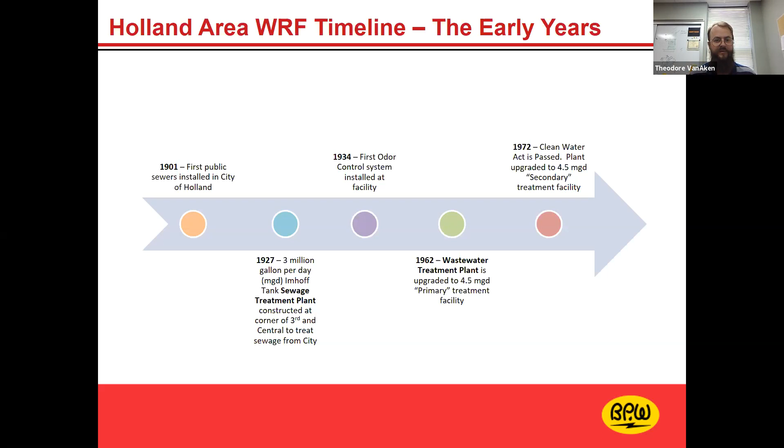In 1927, we added our first actual treatment process, and continuing forward in 1934, we added some odor control. In 1962, that's when we really started to build the wastewater treatment plant as you see it today. And in 1972 is when the Clean Water Act was passed, and that really has guided the development of the water reclamation facility from that point on.

It may not sound like it, but this was really a big step, because to keep people from getting sick, you need to get the sewage and the pathogens away from them. And that's what this allowed, and it allowed our city to grow without having major cholera outbreaks or diphtheria and other human pathogens such as that.

We did have septic tanks on those two main discharge points. So there was some treatment, but I don't know I'd even call it that, because we also had industry back in the day, tanneries and canneries especially, that had a lot of wastewater. So those septic tanks may have caught some solids, but really the stuff going into Lake Macatawa probably wasn't so nice. But given there were a lot less people back then, the lake could actually accept more pollution than it can today with the development that's gone on since then.

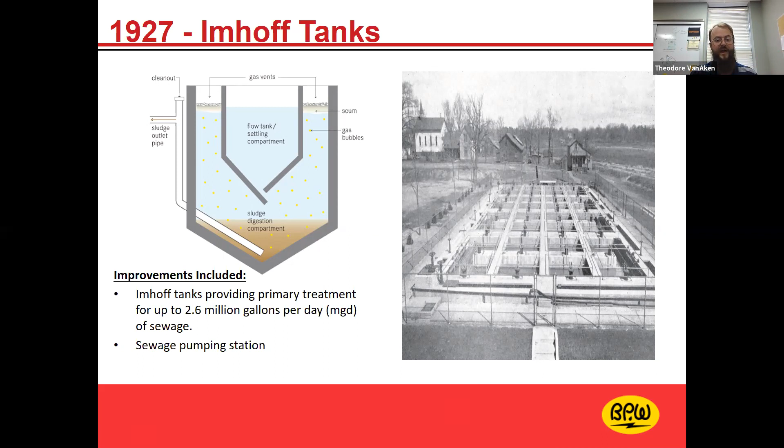The Imhoff tank was a treatment process kind of like a septic tank, but it also would anaerobically digest the solids that fell to the bottom. So the left shows a cutaway of that. It's just something that allows settling to happen. Not a lot of treatment, but certainly better than what we had prior to that with the septic tanks.

And we've always and still are very concerned with odor at our site. We're very close to the city of Holland. Even back in those days we were, there's houses all throughout the site where we're at currently. So we did build an odor control system as far back as 1934. And really what this odor control system did was it burned the gas that came off of the Imhoff tanks, the digestion that happened at the bottom.

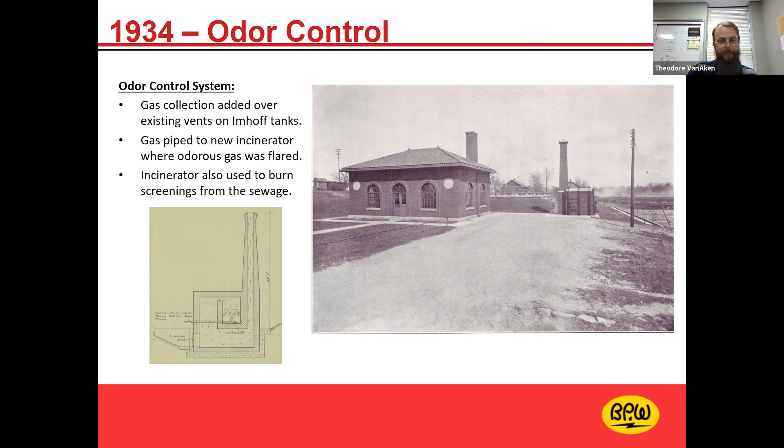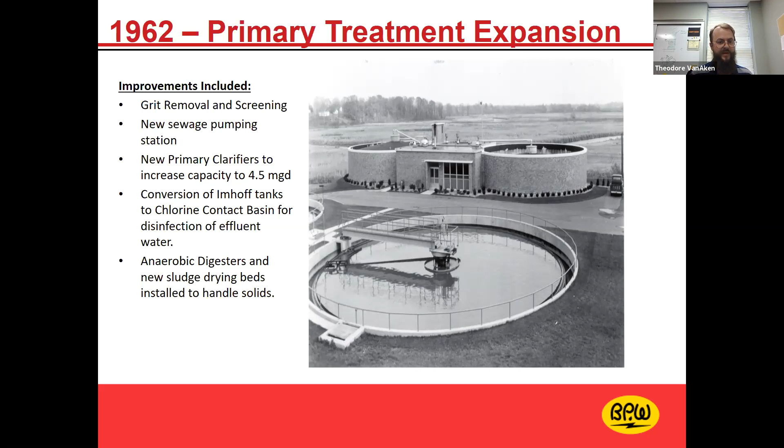So now we start to get into the secondary treatment. These are improvements that have come around mostly from the Clean Water Act at this point going forward. Primary treatment is easy, it gets a fair amount of your pollutants out, but the water that comes off is still pretty gray, pretty smelly. The secondary treatment process is what allows us to get to what I like to call nice, clean, clear water that can be safely discharged into a lake, such as Lake Macatawa.

So to do that, we have to add aeration to feed bacteria to break down pollutants. And then we have to add secondary clarification steps that allow the pollutants and the bacteria to settle down to the bottom of the tank. We'll dive into that when we go through the plant processes a bit more in depth, but these structures are all still in use today as well.

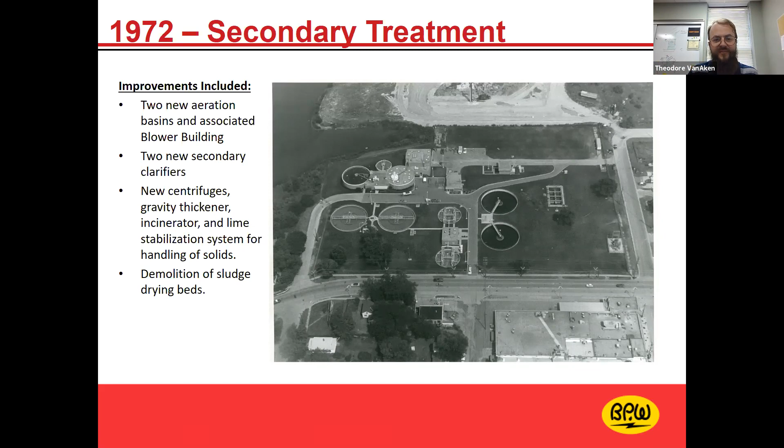We did add some new solids handling equipment for dealing with the biosolids that come off. And then you can see on the north side, that's the Window on the Waterfront park now, but back in those days, it was used as a dump. So there's a lot of work going on over there.

So really from 1980 until today is when the plant, as we see it now, really came into being. We expanded to a regional facility in 1980.

In 1992, we added a true odor control system. We had some odor issues back in those days. We also covered tanks, and we had a very successful program going from 1992 to 2017 of reusing our effluent for the James DeYoung coal-fired plant. In 1996, we did a major expansion to increase our capacity to be able to treat an average of 12 million gallons per day of incoming sewage.

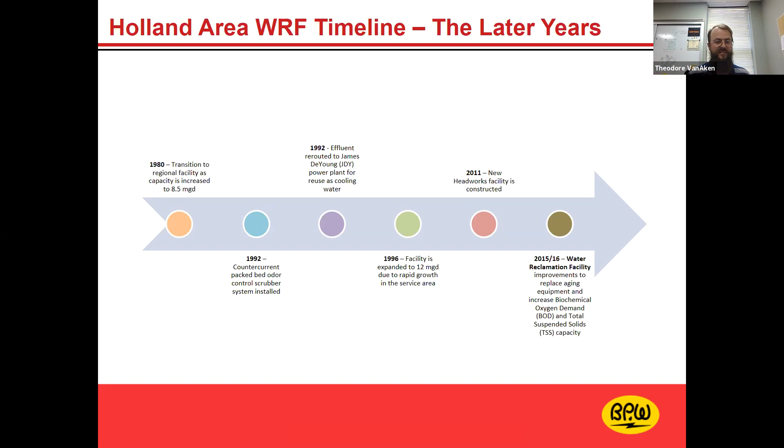In 2011, we added a Headworks facility that I'll review as we go through. Then in 2015, we revamped our plant to expand biological treatment capacity in our secondary treatment, as well as added solids handling capacity, which brings us to the current project we're working on today, which is the anaerobic digester that I'll touch on later in the presentation.

So in 1980, not only did the city of Holland continue to grow, but the townships were seeing a lot of growth on the north side of the river. You had Holland Township, Park Township. We need to do something with their sewage. So the plant was expanded and we added flow from the north side, which comes across the river to our facility for treatment. So we are now treating sewage not just from the city of Holland, but Fillmore Township, Laketown Township, Holland Township, Park Township, and up until recently, Zeeland Township all came here to our facility for treatment.

The west plant, which is where I'm physically sitting right now, on the west side of River Avenue, was built as a high purity oxygen activated sludge process. This uses, rather than ambient air to provide oxygen to bacteria and microorganisms, a refined oxygen product, because that's all the microorganisms really need. So it allows you to treat more in less space.

We added a new administration building, so my office that I'm sitting in currently was added. We added a new maintenance shop. So the plant got a lot bigger at this point, 8.5 million gallons per day average.

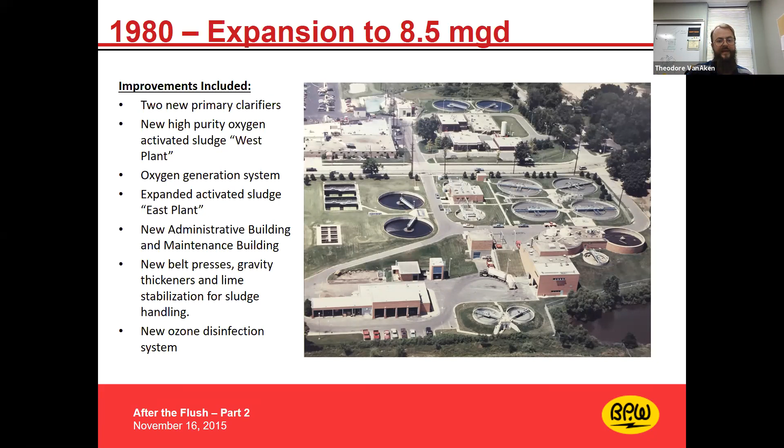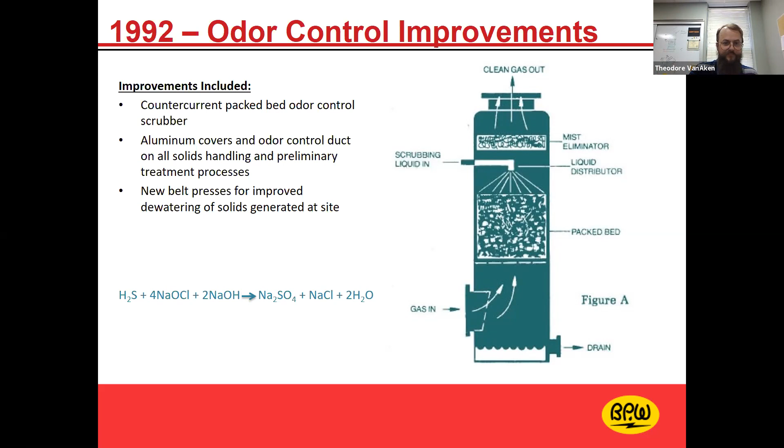In 92, this was actually very forward-thinking on my predecessor's part. We're discharging all of our water from our site into Lake Macatawa. Well, why not utilize that water, which is very clean, and in many cases cleaner than what's in Lake Macatawa, and use it for cooling water at the James De Young power plant. Coal-fired process uses a lot of cooling water. So by discharging our effluent directly into JDY's influent, it allowed them to have cleaner cooling water. They didn't have nearly as much plugging of their heat exchangers. And for us, we didn't have to worry about removing the chlorine from the effluent. So it was a win-win situation. The new Holland Energy Park was built and James De Young was retired in 2017, which meant we had to take on some more duties than before.

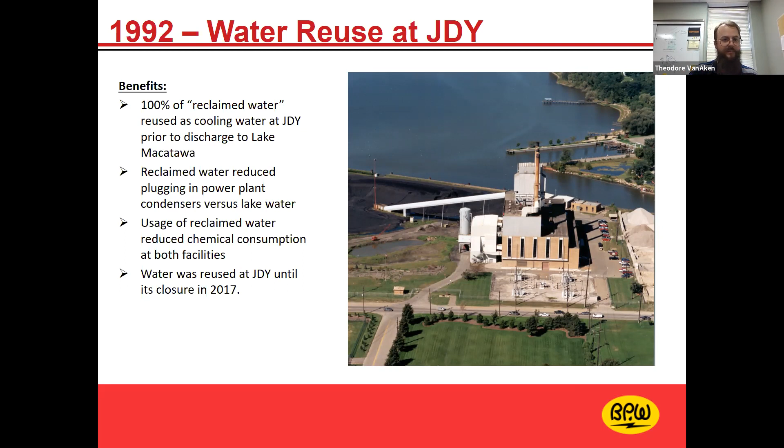Our last real major expansion was in 96. That's when we brought ourselves up to our current capacity, so we currently have the ability to treat on average 12 million gallons per day of sewage coming to us. The way we got to that 96 expansion is you can look on the west side, we actually expanded. There's more reactors there, and there's 2 more secondary clarifiers. That was the big change we did. We added some more aeration to the east plant as well, the part of the plant on the east side of River Avenue.

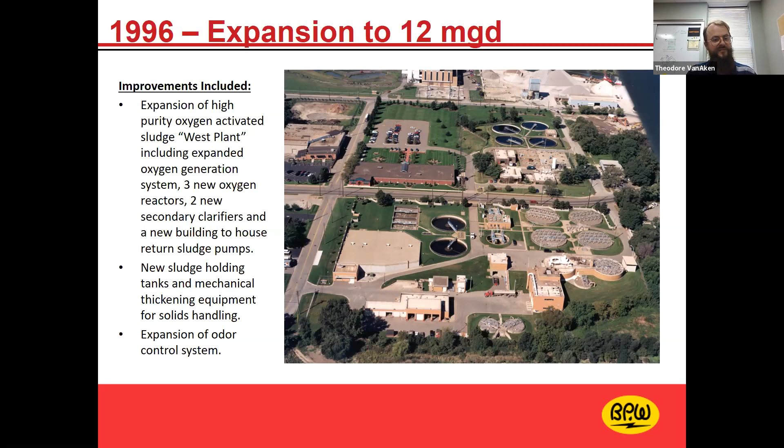So we added some holding tanks for our solids as they're produced, and then we expanded our odor control system.

In 2011, we added a Headworks facility, which I'll go into in more depth further down the line. What Headworks does is screen your incoming sewage flows to remove inorganic particles—sand, gravel, boards, toy cars, whatever finds its way into the sewer makes its way to us. We didn't have a very good Headworks before this, which meant a lot of pumps would plug up and mixers would get covered in rags and other debris. So this facility was built to help us with that.

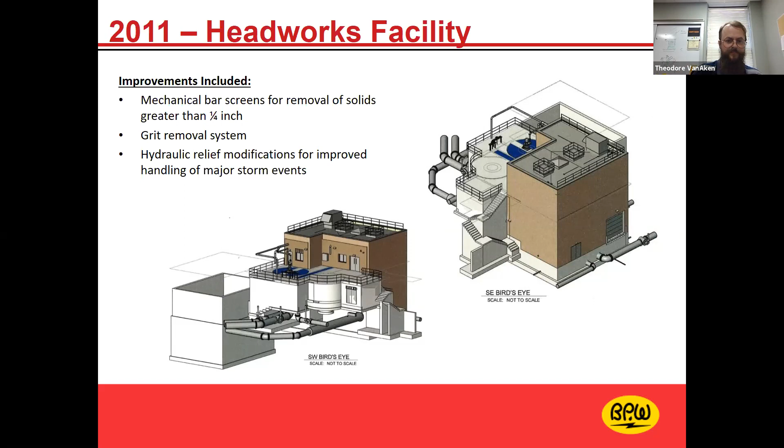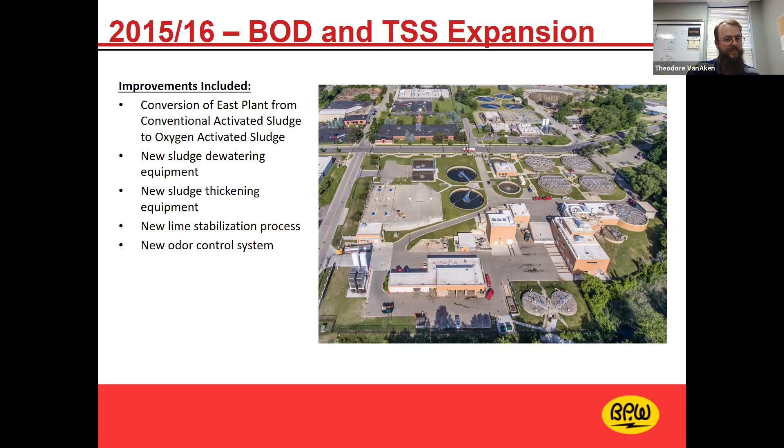In 2015, 2016, this picture looks very similar to the 1996 expansion, but the main changes were converting the plant side, on the east side of River Avenue, to high purity oxygen, as well as the west side. That allows us to get 30% more secondary treatment in the same tank space. For those familiar with our location, we're pretty constricted as to where we can continue to grow. We replaced our dewatering and sludge processing equipment, and replaced our odor control system with the same type to keep that going. That really gets us up to the project today, where we're working on the anaerobic digester, which I have a section that dives into.

But before we get to that, we should really touch on how we treat the sewage coming to us at the water reclamation facility. That's what this portion of the presentation is going to focus on.

Our inputs: we're connected to the sewer system, and we get domestic sewage, like what comes from a household or apartment building—normal toilet, shower, sink drainings. We also have commercial wastewater, like a car wash or a larger store like Walmart or Meijer, and industrial wastewater, which can be very concerning because some industrial processes produce pretty nasty waste. I'll jump into how we manage those in a bit.

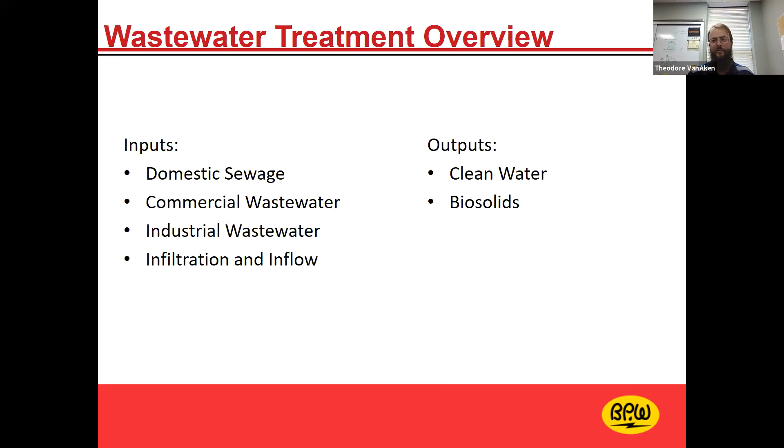Our outputs are really two things. We have the clean water that we've reclaimed—we've pulled all the pollutants out of it, and that's ready to go out. And then we have the biosolids, which is a big part of what we're doing right now with this new anaerobic digester project.

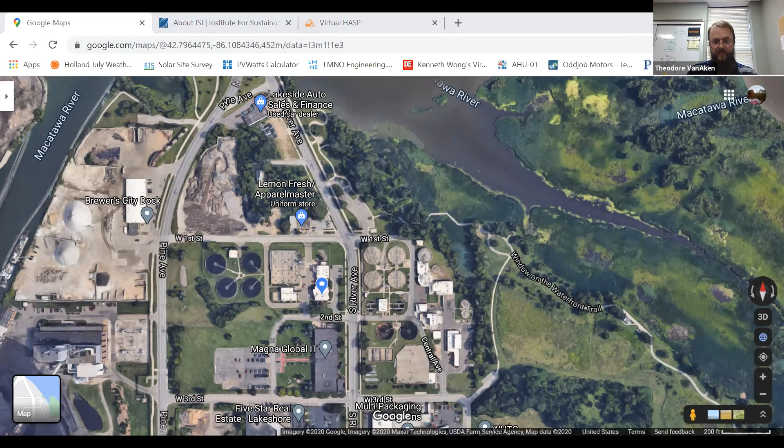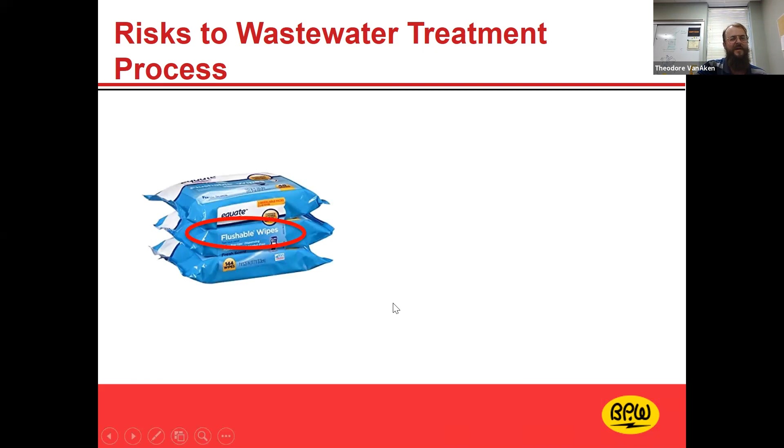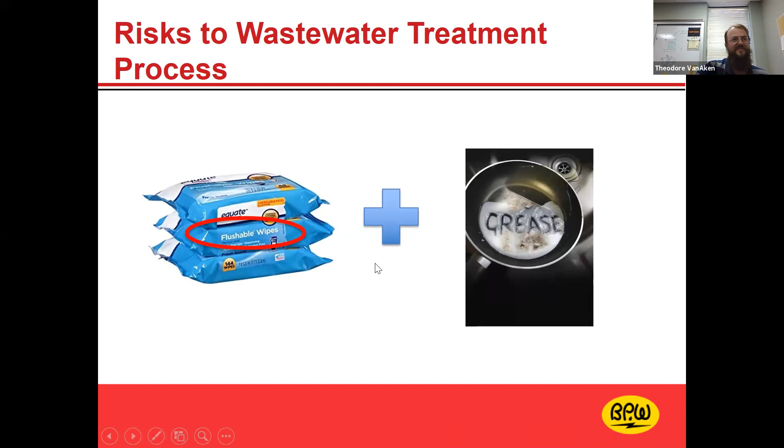Same thing happens here in Holland, just on a much smaller scale. We have crews that spend many hours a week jetting out sewers, trying to clean them out just to keep the wastewater coming to us. And even when it hits our facility, we still run into issues here as well. It plugs things up, it's dirty, it smells bad. So please, just take note, be very careful about what you flush down the toilet or send into the collection system, because it can have a huge impact.

Expenses and safety too, because it's not only unsafe for the worker to go in there, but when the sewer does plug, it will cause the sewage to back up and it could overflow manholes. It could even overflow in your basement, which none of us want to happen. It's happened to me at home before, and it's really not a great day.

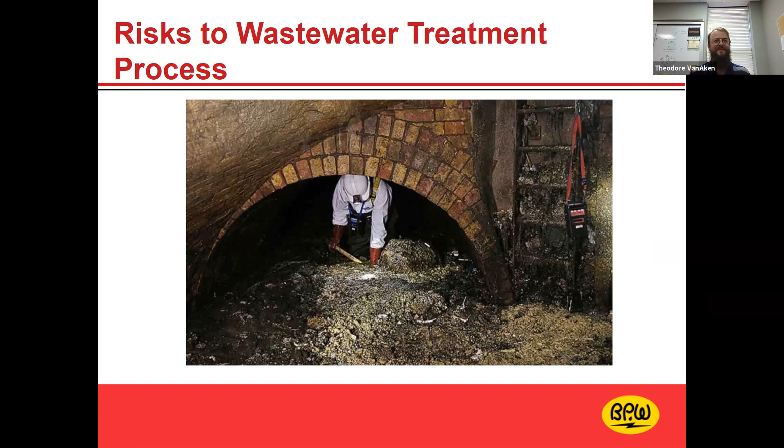So grandstanding and soapbox aside, I wanted to review with you our guidelines for the water reclamation facility that we have worked out with the state of Michigan, the Department of Environment, Great Lakes and Energy, previously the Department of Environmental Quality. They dictate what we can discharge on the clean water side, and what we can put out there on the biosolids side. These rules are promulgated by the Environmental Protection Agency, and EGLE takes them and helps craft them into permits for all of us.

So any city or larger industrial site that discharges wastewater to surface water or groundwater has to have one of these National Pollutant Discharge Elimination System permits, or as we call them, the NPDES. This is put together with EGLE. They go through mass balance spreadsheets, look at lake temperatures, influent and effluent temperatures, and give limits to facilities such as ours that ensure when they discharge their clarified and cleaned wastewater, we're not going to have a negative impact.

On our receiving waters, which for us is Lake Macatawa, right by the James De Young power plant, just on the north side of it, is where we discharge. So you'll look through here and you'll see some of these have different limits from summer to winter.

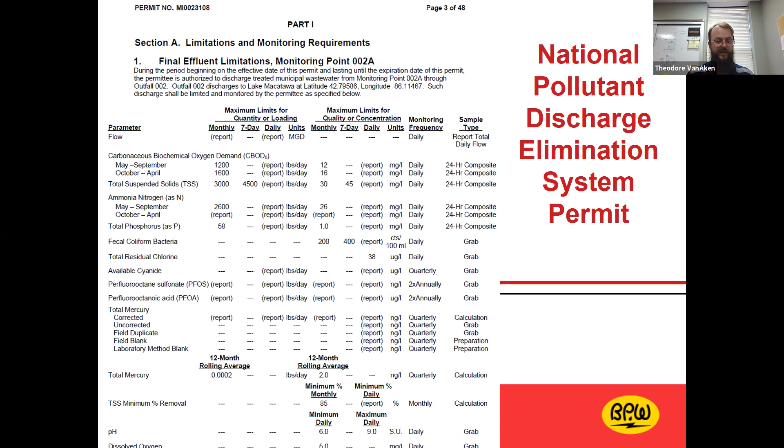We have to remove a certain amount of our total solids. We want our pH to be a nice neutral number between 6 and 9, and dissolved oxygen has to be a minimum of 5. So those are all the things that I look at every day. We look at our treatment process, all of our operators here, to ensure that we meet the terms of this permit at all times to keep Lake Macatawa healthy and safe.

Holland Township manages their sewer collection system, that's why I don't have as readily available a map of it. But they range all the way as far north as Target, I believe, and they go all the way out to the lake as well. So we have quite a few miles - I think 200 some miles of sewer mains that come to here.

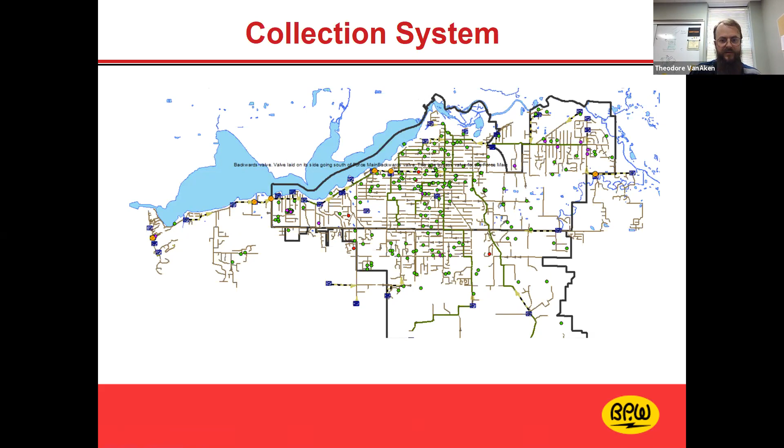So, for the plant, we could treat the wastewater here, but also a big part of what we need to do is make sure that what comes to us can be treated. And we do that through the industrial pretreatment program.

I was commenting to Kay earlier, but this is the same department that's working with Hope College on their COVID-19 sewage testing. This crew has 2 technicians, 1 supervisor, and I do a bit of the management there as well. We're working on monitoring what's coming down the sewer to the water reclamation facility through the collection system.

The biggest thing that we're doing is working with our major sources of wastewater. So that's going to be your industrial customers, and especially food processors, chemical facilities. You have to keep a close eye on chrome plating for metals. We actually know all of these

organizations in our collection system area. They know us. Most of them actually have permits that we issue to them saying what they can discharge to us, very similar to that permit I showed you earlier, but it's not an NPDES.

So we sample them on a monthly basis. Some are sampled quarterly, some are monthly, some are multiple times a month. And we're tracking those compatible pollutants - that's your biological oxygen demand, your phosphorus, your total solids, your ammonia.

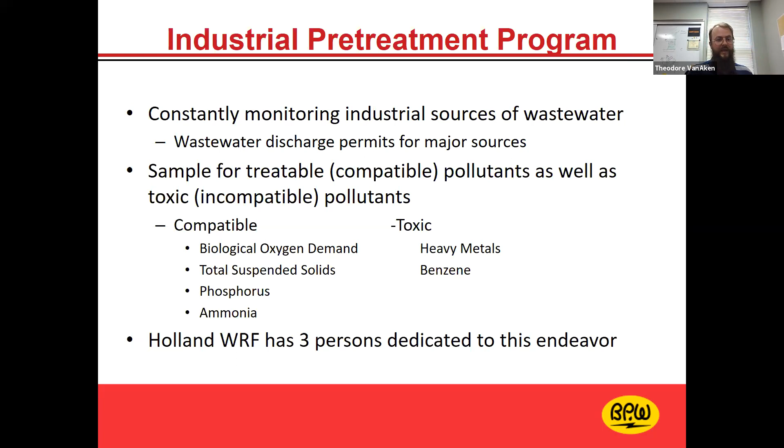This sampler can be discreet. We don't generally tell people when we're sampling them. We want to make sure that we're getting a realistic snapshot of what their sewage is coming to us, because we don't have time. We can't sample every customer every day, unfortunately. There's just not enough time and not enough money is the real big thing for that.

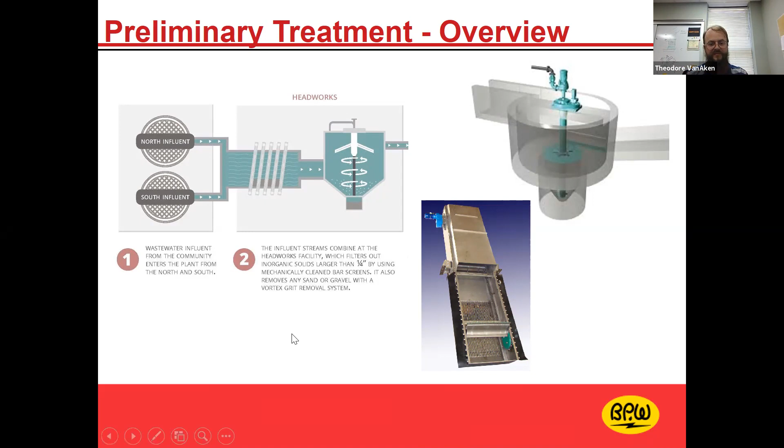The next slide shows a layout of what that actually looks like in person. I wish I could have all of you at our site because I'm much better at describing this when I can point at things. But inside of the building, we have two screens. The sewage comes to us from the north and south side, then it goes through the bar screens, and then it goes to the vortex grit chamber.

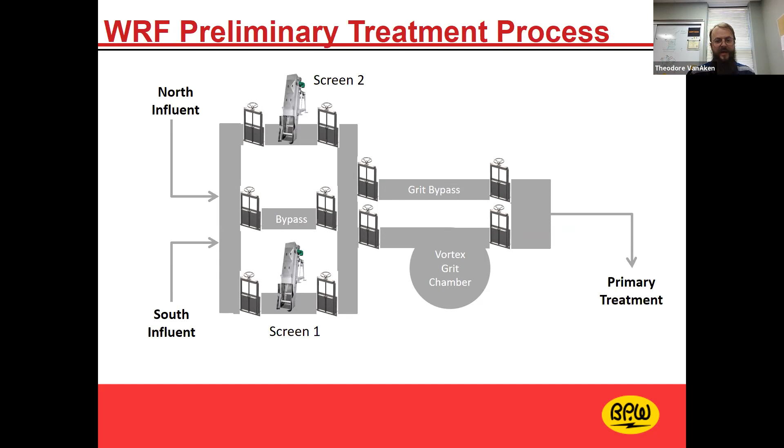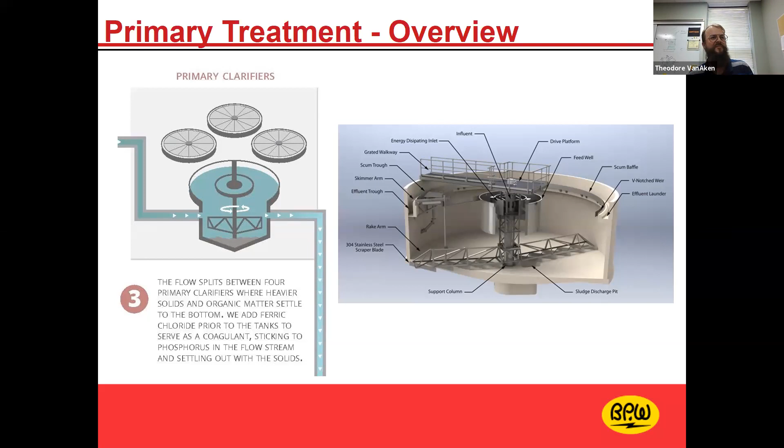With primary treatment, a rule of thumb is you get about 40% of the treatment done. So when we come off the primary clarifiers, it does smell funny. It's still gray water, but not as putrid as it was when it was just raw sewage left to sit.

This is also where we do our phosphorus treatment, which is done by adding ferric chloride in liquid form. It's a chemical added to this raw mix along with the effluent from the headworks process. That ferric chloride binds to the phosphorus and causes it to flocculate together with the heavy solids that sink to the bottom. If we have more phosphorus coming in, we just turn up the ferric chloride and it draws it out. So it's fairly straightforward and easy to treat for phosphorus - it's just very expensive. That's why we work with our customers to limit the phosphorus that comes into our site.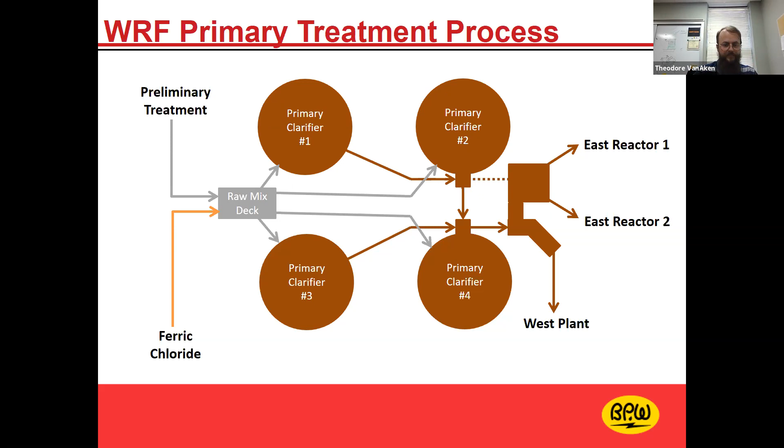After primary treatment, we split. All of our primary clarifiers are part of our East plant - they were part of the first iteration built back in the 60s and early 70s. After the primary, it splits to our East and West plants for secondary treatment, and the secondary treatment process is the same overall on both sides of our facility.

In this process, we add oxygen - in this case, high purity oxygen - into the primary effluent, and that feeds microorganisms, mostly bacteria. There are some little protozoans you can see in there, and they do their job breaking down the pollutants, eating up the organic pollutants, especially the biological oxygen demand. By mixing it well and adding oxygen, we're doing all the work that would normally happen out in the lake, but under a controlled environment, so we can knock those numbers down before the water is discharged.

After it goes through the bioreactor aeration stage, it goes to our secondary clarifiers, which are functionally identical to the primary clarifiers. But at this point, we're not just letting the pollutants settle out on their own. What we do is limit the food, and without any new pollution coming in, these bacteria and protozoans eat as much as they can and grab on to what's left.

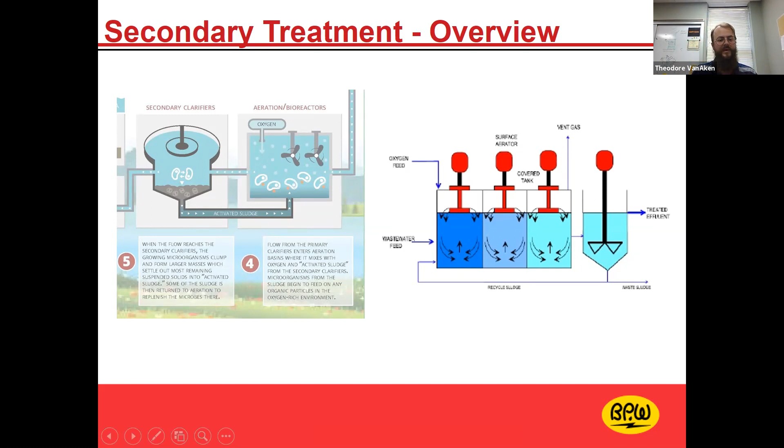They just sink to the bottom of the tank and go dormant. At that point, we are drawing off those solids to our solids handling process, but we also utilize a portion of those solids to reseed the aeration and bioreactor phases. That way we can ensure we always have a healthy population of bacteria, because you need a lot of them to do this.

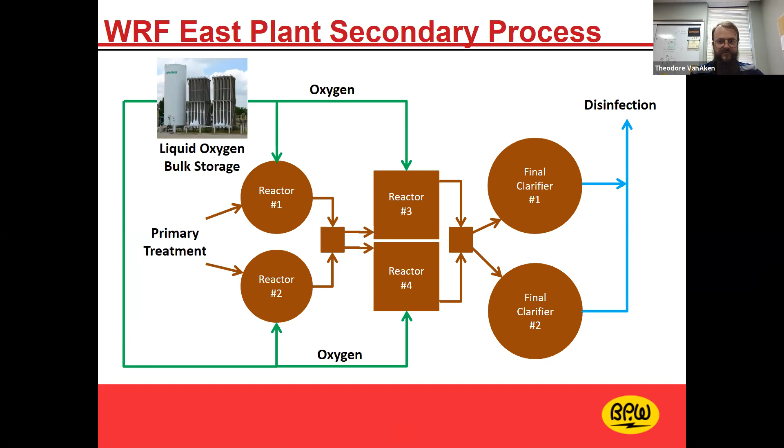So this is a schematic of our East plant secondary process. We have 4 separate open top tanks where we're adding oxygen, where the hard work is happening with the microorganisms, and we have 2 final clarifiers. I wished I could have had more pictures, but I was able to get some to share with you so you understand what they look like.

So I'm standing where the person that took this photo was standing, with their back to River Avenue, looking east. This is one of the 4 bioreactors, which we call the East reactor. That mixer is actually floating in the center, with a propeller on the bottom of it. That mixer is taking oxygen, fed to it through this green line, and mixing it in, allowing it to eat away at the pollutants that are there.

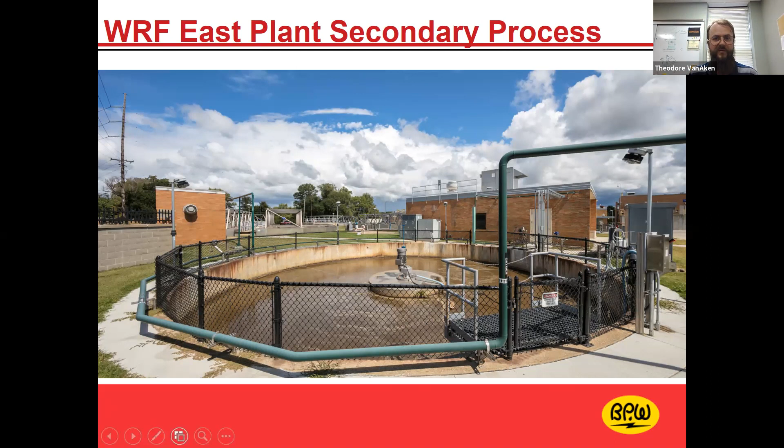Once we're through with that part, we go to the secondary clarifier. This is a picture of one of ours, and we have 6 secondary clarifiers, all basically the same. It's hard to tell, but it looks kind of brown in here, because all those bacteria and microorganisms are in the water, settling down and working their way down. The clarified water off to the side is clear, especially unless we're having a bad day - that water is going to be really nice and clean and ready to go out. So we're 90+% treated at this point.

The west plant is very similar to the east plant, it just uses a different tank technology. These reactors 1 through 5 are actually enclosed tanks, but they do the same exact thing as the reactors I just showed you. We have 4 final clarifiers on the west side of the road, which allows us to do more treatment on the west side than we can on the east side. We do about 2/3 of our treatment with the west plant and about 1/3 with the east.

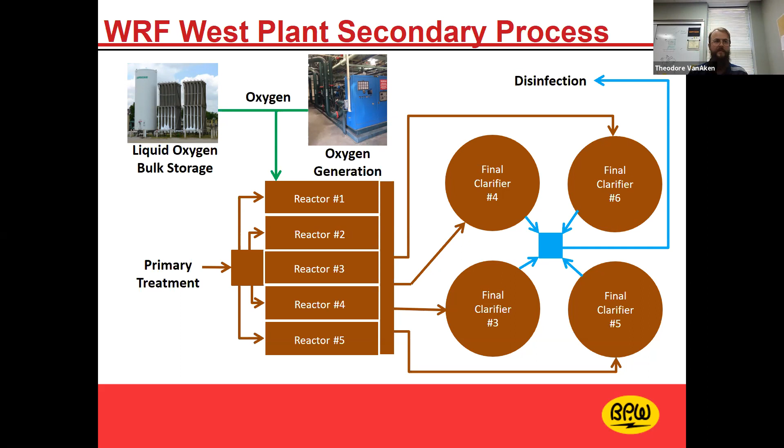We do have the ability to generate oxygen, and that's a pretty neat process. We're basically taking air and scrubbing out the nitrogen, and whatever oxygen is left goes to the reactors. The rest of our oxygen is supplied by Praxair, which generates oxygen in Detroit and the East Chicago area. We get trucks in with deliveries every few days.

After we've done our secondary treatment on both sides of the road, we are disinfecting. This is what's eliminating the human pathogens that may be left in the wastewater. All the solids are already gone, the BOD has been treated, and we're now disinfecting using sodium hypochlorite bleach. We used ozone at one point in the past, but what we're doing here is just like when you're disinfecting something at home - we're just trying to kill any sort of human pathogen, which is why we're tracking fecal coliform bacteria.

So not only do we add the sodium hypochlorite or bleach, which is at about 15% strength, we let it sit for a minimum of 15 minutes, which kills the coliform, kills E. coli, all of that. Then we have to use sodium bisulfite, which removes the bleach from the water, and then it's safe to be discharged out into Lake Macatawa.

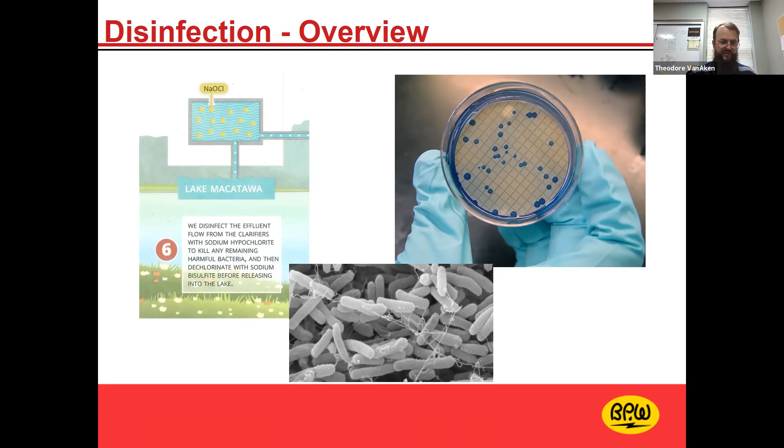This is a simple schematic of what that tank looks like. It has 2 trains, a north and a south part. We add the sodium hypochlorite to the flow that comes off of our east plant and west plant secondary clarifiers, and then we add the sodium bisulfite right at the end before it goes out to Lake Macatawa.

We do have a reclaimed water system, which we can't sell to be reused out in the public, but we are able to reuse this water on our site. So all of our irrigation water inside of our fence is actually treated wastewater effluent, and we also use it for a lot of our process water.

If you go down to Florida, or the Southwest where water is very scarce and expensive, a water reclamation facility will actually pump their treated wastewater to golf courses, industries to use for cooling water. There's lots of uses for it. They generally are treating to a higher standard than what we do, but it can be done.

And actually, there are some that discharge their wastewater effluent into their drinking water reservoirs, if you would believe that. Because at this point, it is basically just water. It just needs to be filtered and chlorinated, and it's ready to go back into the drinking water systems for people to use.

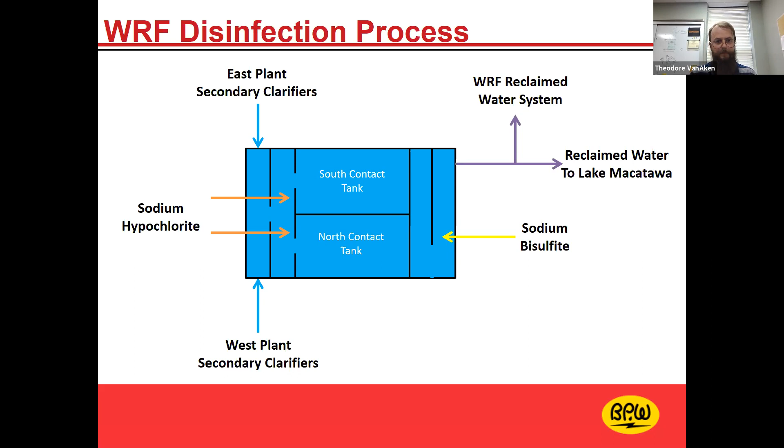So now that's the liquid process, our first output. That's honestly the easiest output of the two. The next part I'm going to focus on for a little bit is the biosolids portion. Our biosolids go to two different uses right now. One is actually just landfill disposal, it's not even a use, and the other goes to land application.

So for the landfill, we are dewatering the solids. When we pump the settled solids from our primary and secondary clarifiers, they are anywhere between 1/2 to 1.5% total solids. So that means the rest of it is water, they're like 99% water or so.

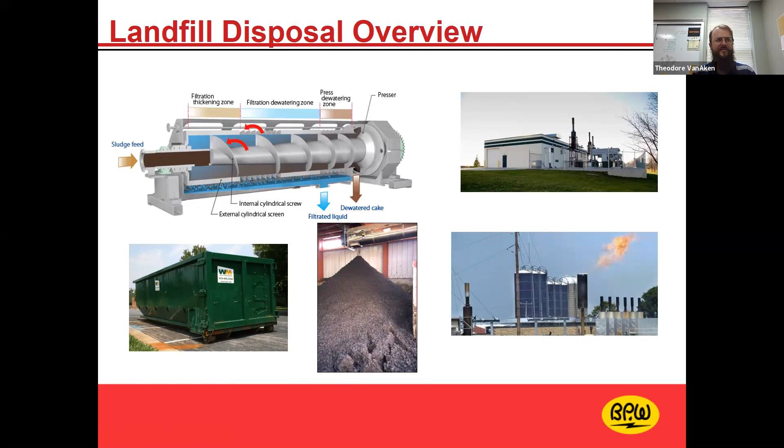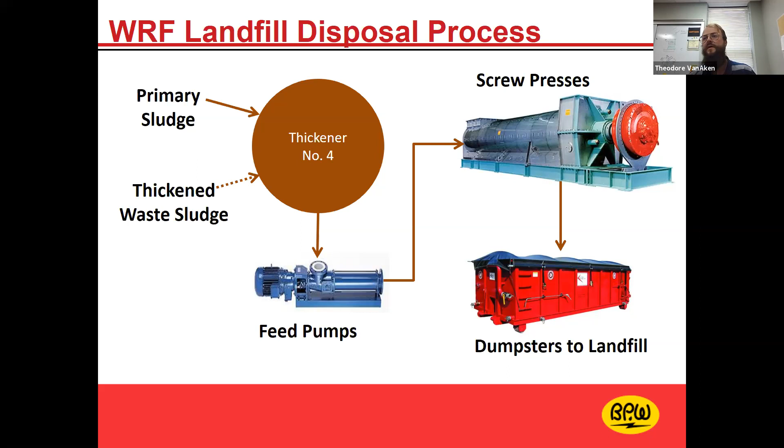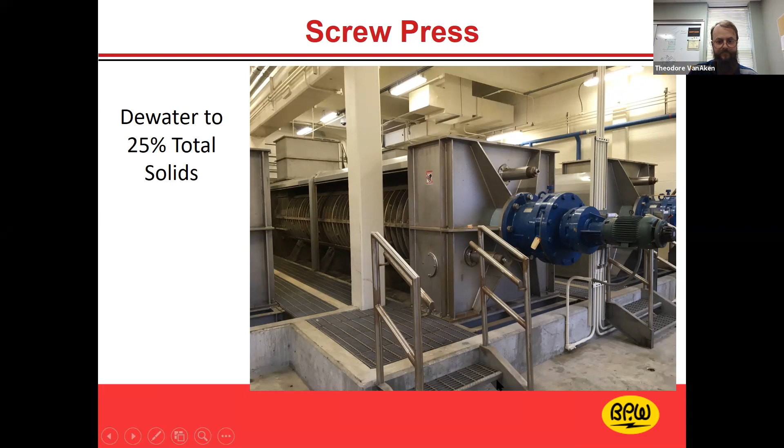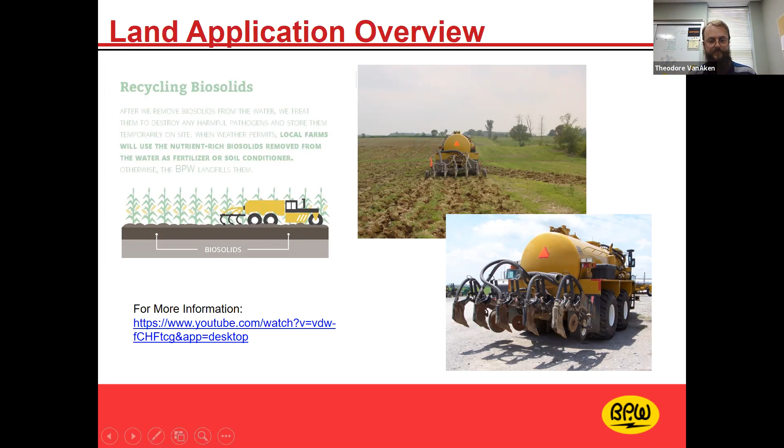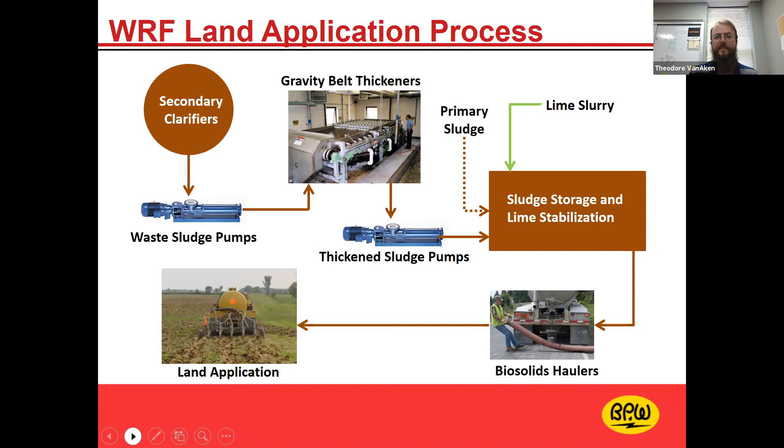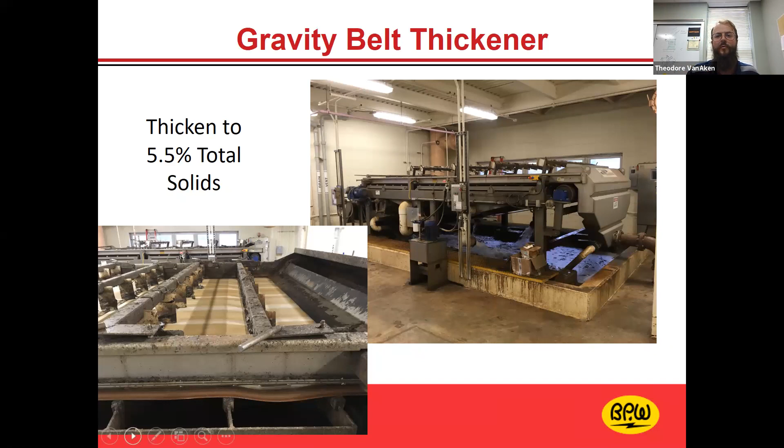That picture on the bottom left is a close-up of the belt. This doesn't have any solids on it—it's our machine that we just cleaned. You can see there's this flexible fabric belt, and as the solids ride across, it hits all of these fences and flips over. The solids flip, and the water via gravity goes through the fabric while the solids stay on top. So that's a very quick, easy, efficient, fairly affordable way to separate solids and liquid in the wastewater process.

Some of you may have seen a talk I did about a week or so ago on biosolids, and these are some slides I pulled from there because I want to help you understand what they are. They're a hot topic item—they always have been, and I think they always will be—along with the steps that we take to keep these biosolids safe.

The water side, like I said, is easy. Biosolids are defined by EPA as solid, semi-solid, or liquid residue generated during the treatment of sewage in a treatment works—I pulled that right off of the EPA's website, they had a couple different versions. Generally there are three components: the primary and secondary solids that I told you about earlier, and the FOG, which stands for fats, oils, and greases, pulled off of our primary clarifiers.

Generally, across the country, you're going to see three end uses for biosolids: land application, which we currently do here in Holland, landfilling, which we also currently do, and incineration. We actually did incinerate at one time back in the 1960s. It didn't go very well, and it was abandoned, I think, after only about 5 years or so.

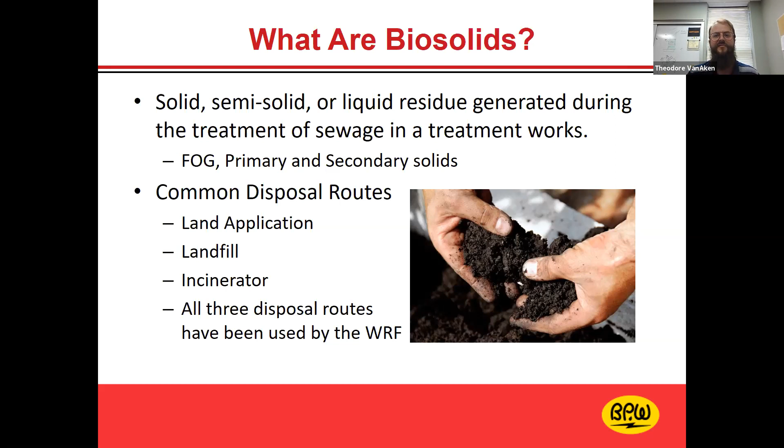Biosolids safety is always something that is brought up, because biosolids are all the solid portions that aren't treated as water. So there are things you need to keep an eye on. We have to watch the nutrients in the biosolids—that's a big part of it. We can't overload the agricultural fields. We don't want to cause any runoff that makes its way into the watershed, because that could cause algal blooms and poison the water. You don't want to have any sort of vector being spread.

So we spend a lot of time and money making sure it's land applied right and well monitored. The part I was discussing earlier, our industrial pollution prevention or pretreatment program—our IPP guys—play a pivotal role in keeping toxic chemicals out of our biosolids. Heavy metals are a big one, and PFAS, PFOA is a big one. We also treat to Class A and Class B standards set up by EPA for human pathogens, to make sure these biosolids are safe.

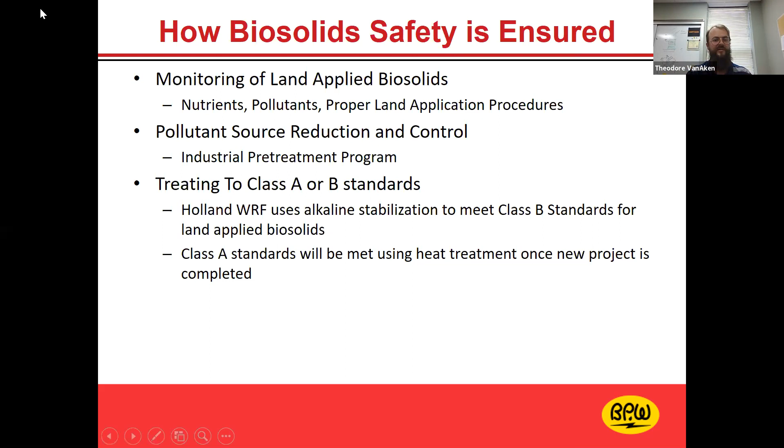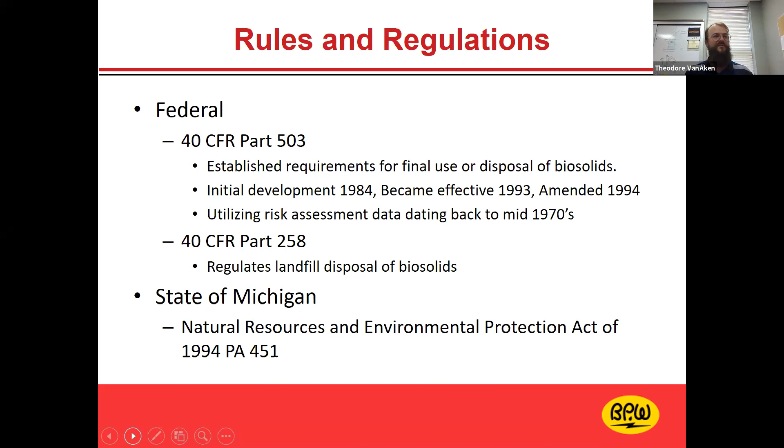As I said earlier, we're using lime right now and treating to a Class B standard. Once our new digesters are put in, we'll be treating to a Class A standard. There are rules and regulations to all of this—a lot comes from the Clean Water Act. There's 40 CFR Part 503, and Part 258 on the federal side. The state of Michigan has the Natural Resources and Environmental Protection Act of 1994. Those really guide and dictate what we can do with our solids to beneficially reuse them or send them to a landfill.

As part of those rules and regulations, we and any other wastewater treatment facility that beneficially reuses their biosolids have to have a residuals management program. We developed this using EPA guidelines, and we have it approved by EGLE. That outlines how we treat our biosolids, how we land apply our biosolids, what we're doing to monitor them, making sure that we have the right classification. Something you'll hear me talk about is vector attraction reduction. That's referring to vectors like flies, rats, or mice, anything that could potentially spread disease, maybe take it from a field and spread it to a community, which we don't want to do. So that's all a big part of the treatment process.

To go a bit more in depth on the classification of biosolids, the EPA set these rules up many years ago to ensure we have safe and identifiable methods to treat our biosolids and reduce risk of human health issues. So vector attraction is a big part of it. That's why we subsurface inject our biosolids. Anaerobic digesting helps with that as well, it eats up all the tasty parts, so the flies and the rats and mice have no interest in it.

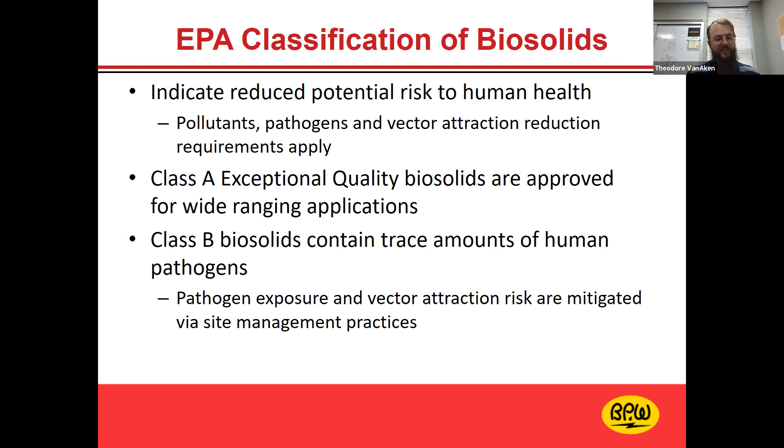The Class A biosolids, I'll show you some examples, can be used for many different applications. You can use them as soil amendments, as fertilizer. They're a clean product, proven to have very minimal amounts of any vectors or pathogens. Class B do have more, and that's what we currently have. That's why we have to be very careful about where and when we land apply them, because we use site management practices along with lime stabilization to ensure there's no risk to human health.

For the Class A biosolids products, the most famous one, especially in this region, would be milorganite. Milorganite is sold at pretty much any gardening center, you can get it at Lowe's, Home Depot, Menards. Milorganite is a Class A biosolids product that comes from Milwaukee, Wisconsin, from their wastewater treatment facilities, and they've been producing this since I believe 1919. It's been proven to be safe, and is used a lot in golf courses.

City of Chicago has a Class A biosolids product they call EQ Compost, which they just use locally in the Chicago area. Washington, D.C. has one they call Bloom. If you do some searching online, you'll find many examples of products that are either sold or given away that can be used for soil amendment properties, adding organic matter to soil, not just the nutrients.

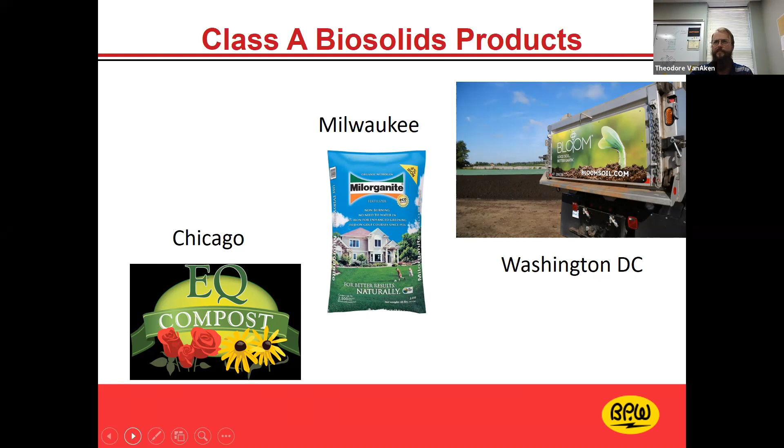Speaking of the nutrients, it was used as a fertilizer, so N, P, and K, nitrogen, phosphorus, potassium are all present. So whatever we land apply, we track not only the nutrient levels of the soil of the field, but we need to know what crop is being grown on it and how much of the nutrients that crop is going to use, because corn uses so much nitrogen, so much phosphorus. If we keep applying more than what the corn is going to use, eventually the field will meet a saturation limit, and those nutrients will run off into the watershed, and we certainly don't want that.

Heavy metals are a big one because they bioaccumulate. So we test for the following: arsenic, cadmium, copper, lead, mercury, nickel, selenium, and zinc. EPA has some set limits that those need to be under, and we're fortunate that we're well under all of those. If we were to ever have an issue with heavy metals in our biosolids, we would handle that through the IPP pollution prevention program.

PFAS is what we call an emerging contaminant, similar to mercury, which was one probably 20 some years ago that we had to work our way through. PFAS is the one we're dealing with now. I'm sure most of you are aware of it, it's a pretty hot button item, but if you're not, it was like Scotchgard. It's used for anti-stick, anti-foaming agents, and metal finishing for chrome platers. Unfortunately, it's incredibly pervasive in the environment, it's everywhere. So even if we test our domestic wastewater coming in just from households, there are small amounts of PFAS chemicals in it. So we're working very closely with EGLE on this as we move forward.

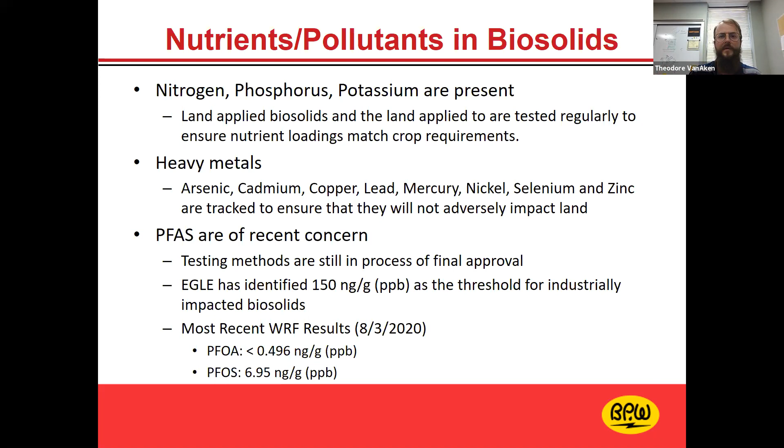So I've clouded your mind with a whole bunch of information. We've covered the history, how the plant works, what we're doing with our biosolids, and I want to go from the biosolids to really probably the most interesting thing in my day every day — and hopefully some of you will be interested in this as well — our anaerobic digester project currently underway at the Water Reclamation Facility. If any of you have been down to Window on the Waterfront lately, you'll notice there's some demolition going on, some old tanks being removed.

We're in the process of building one of these anaerobic digesters. I have a picture of two that will be similar to what we end up with. The pretty nice sky blue, robin's egg blue one on the left is from Hershey, Pennsylvania, and the one on the right is from right down the road in Grandville. So you can actually see the top of this digester when you're going down 196 heading towards Grand Rapids.

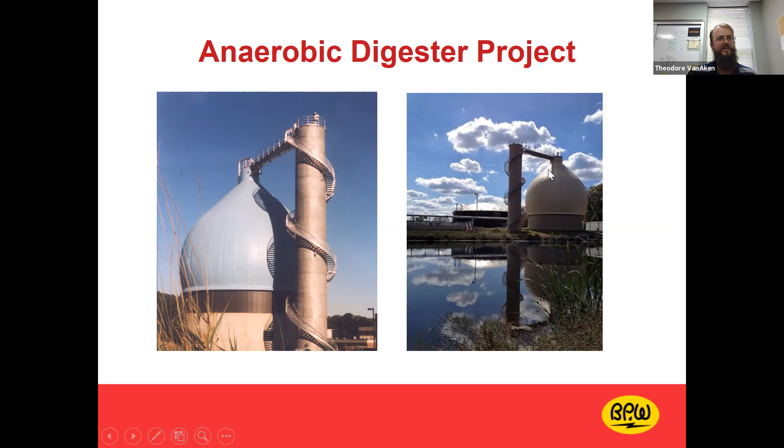The question is, we had an anaerobic digester back in the 60s, and we moved away from it — so why go back, why should we do this? Well, we're always trying to be sustainable. We're trying to have a process that best serves our customers. And the biosolids have been very high risk, and they have been forever.

Two superintendents ago, he still emails me nightmares about the biosolids issues they've had to deal with in the past. We have three large risks to our disposal of biosolids: landfill limitations, storage limitations, and land application limitations. The landfill limitation really is that they don't want as much of our dewatered solids as they used to take — matter of fact, we've been cut down by almost 50% by the landfill we're currently using.

And that's because these solids are still 75% water. That means they shift, they flow. So you need to mix these biosolids with municipal solid waste, like what might come from your house, in order to make it set in a cell properly. It's a great thing, I think — recycling has done wonders, and composting. There's a lot of waste diversion efforts out there, and they're working. Unfortunately for people in the wastewater industry, that means there's less municipal solid waste to mix with your dewatered biosolids products, so that's a big limitation there.

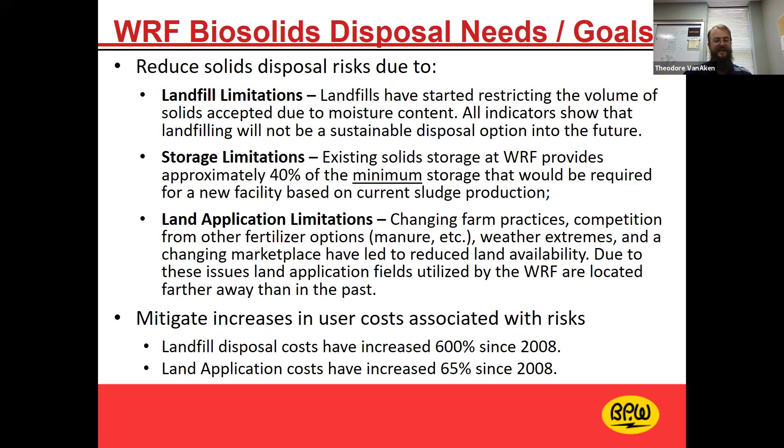So all of those together are high risk. And what does high risk mean? High cost. Our landfill disposal costs, it's an astronomical increase. I started tracking this, we're from 2008 to now, it's gone up by over 600%. It's really hard to budget for a 600% increase, and we don't know where they're going from here. Land application is more affordable, but it's still gone up 65%.

So we needed to do something, so we can continue to serve our customers. And so that's kind of what led into this project.

So BPW, we wanted to look into how we're approaching this project. We want to look at this holistically, we want to look at it sustainably. So what do we want? We would love to reduce the volume of our biosolids. We'd like to produce green energy, Class A biosolids. We want to do something that's not only cost effective, but environmentally friendly as well.

So that's what brought us towards the Envision design principles. For any of you familiar with the Holland Energy Park project, that was done under Envision design principles as well, and I have a little bit on that next.

So Envision kind of means that we're looking at things holistically, we're following a sustainable outlook. And as part of that, we decided, well, maybe we should apply for state revolving fund money. That's a low interest loan or bond, basically it's EPA money managed by the state of Michigan, and they will give you money back if you're doing something that's environmentally innovative. We're very fortunate, they gave us $6 million to help pay for this project. So to me, that really vindicates that we're doing something that's environmentally friendly and sustainable.

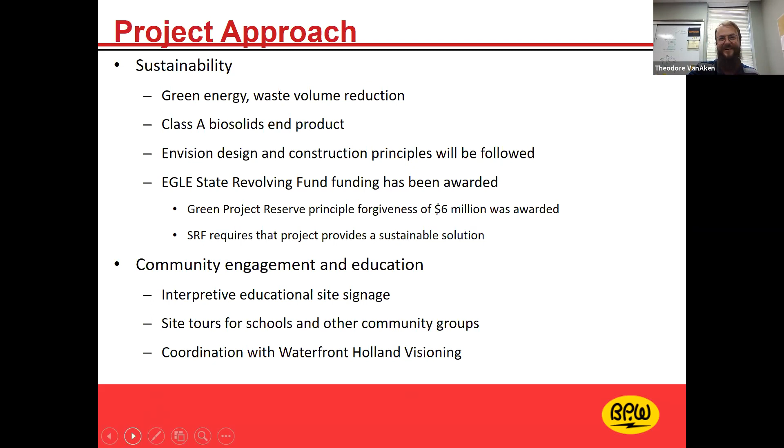We need to bring the community into this. So we've been working with Outdoor Discovery Center, we've been working with the Holland City Parks Department. We want to work on having interpretive site signage around the facility. Someday, when people can visit again, we'll continue to have tours like we always had. We want to make sure that we're going to fit in with Waterfront Holland visioning, as we're a key part of it. For some people, like it or not, it's not going to be easy to get this plant relocated from where it is right now.

For those unfamiliar with Envision, it's a process kind of like LEED for infrastructure is how I like to describe it. It provides a consensus-based framework for assessing sustainability and resilience in infrastructure. This Institute for Sustainable Infrastructure is a combination of several different groups: the American Public Works Association, American Society of Civil Engineers, American Council of Engineering Companies, Harvard Graduate School of Design, and the Zofnass Program for Sustainable Infrastructure. It really wants us as utilities to do things that are sustainable and equitable for the communities in which we work.

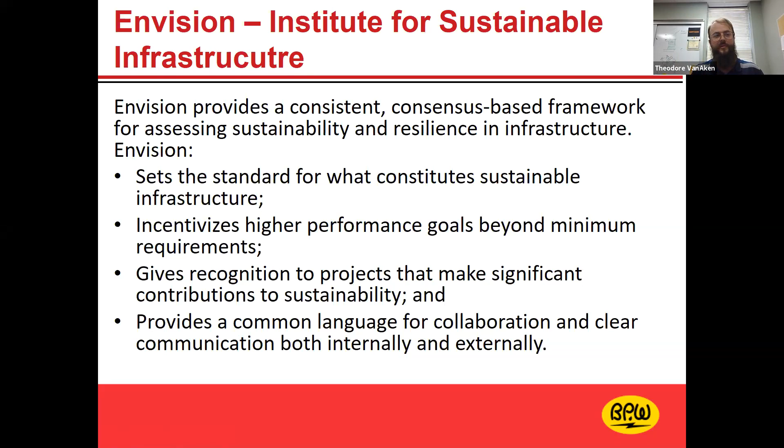So our goal on this - there are several different phases, you can be Envision verified, silver, gold, platinum. So we're hoping to get gold. We're aiming pretty high with this project, and I think we'll be able to make it.

So we've decided what we need to do. We decided we need to do something first. Now, what are we going to do? In 2015, we replaced our solids handling equipment. In 2018, that's when we decided we need to do something further. So that's where the alternative analysis came in.

So we looked at several different options for disposal, not just anaerobic digester. We looked at expanding our storage, we looked at doing thermal drying to make like a powdery product, we looked at some different types of anaerobic digesters. And we decided after looking at the numbers that it made the most sense to move forward and look at digesters, but also look at additional storage.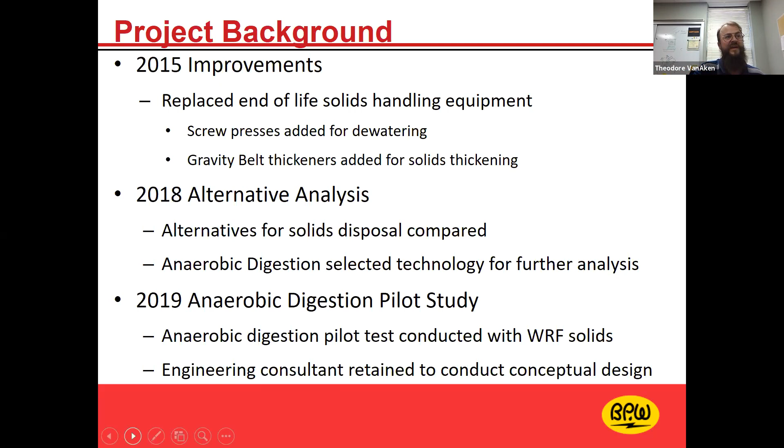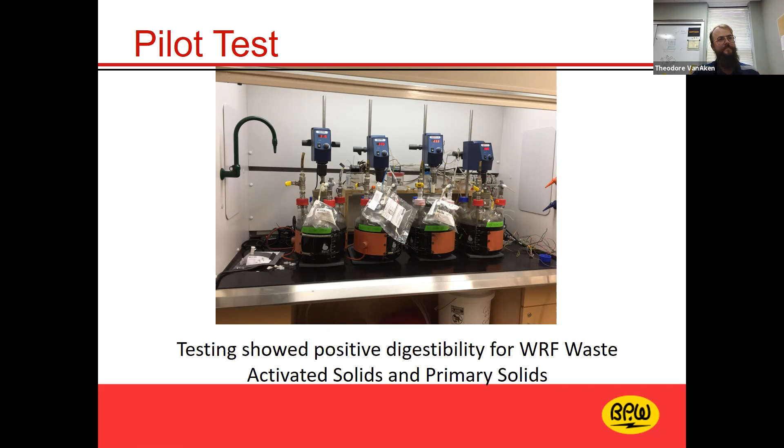So in 2019, we did a pilot study, partnered with Kettering University, who runs miniature digesters in their lab, and we did a conceptual design. For those curious what a little miniature lab digester looks like, here's a picture from Kettering, and there's 4 different small carboys there, each one being mixed constantly and heated, producing biogas, and they're catching it in plastic bags attached to it. That allowed us to understand if we can digest, which we could, and it actually looked like it worked really well for us.

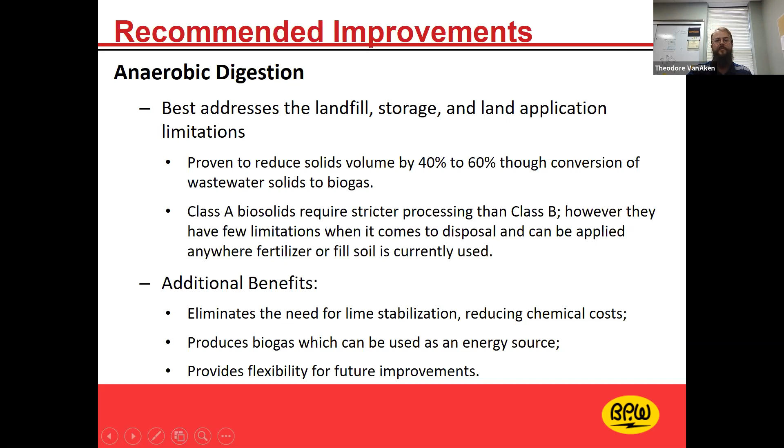From all of those steps that we took coming up to now, we determined yes, digester is the way to go. It's going to reduce our volume of biosolids because it converts them into a gas form that's rich in methane. And we're going to make a Class A biosolid because it gives us more options for what we can do with it after the digester. We're not going to have to do lime stabilization anymore. This will be an integral part of our plant that we can design around into the future.

An anaerobic digester is really nothing more than an enclosed tank with no air in it. There's no oxygen, hence anaerobic. It has different bacteria, anaerobic bacteria, and the tank is mixed.

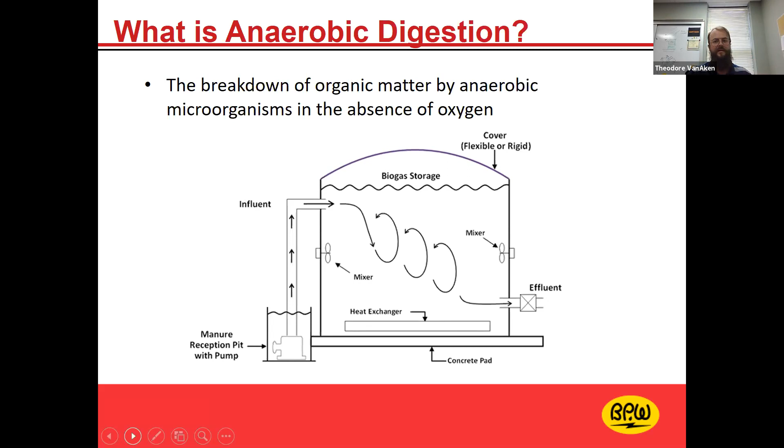We're going to be able to remove like 40 to 60% of our biosolids through this process and turn it into a usable product, which is the biogas.

We've chosen to go with an egg-shaped digester, which I showed pictures of at the beginning. And an egg-shaped digester really just means that the insides of the tank are all rounded and it's completely round. There's no square corners or anything. And that provides better mixing and provides less places for the solids to deposit into.

So the corners of a normal flat bottom tank, solids will settle down and stay on the bottom, and you have to clean them every so many years. It's a very odorous process. And we've proven that they've been able to run these digesters. We've talked to people who have been running them for 20, 25 years even, and haven't had to clean them. And when they have emptied them, they've been in perfect condition. So for us, it just makes great sense.

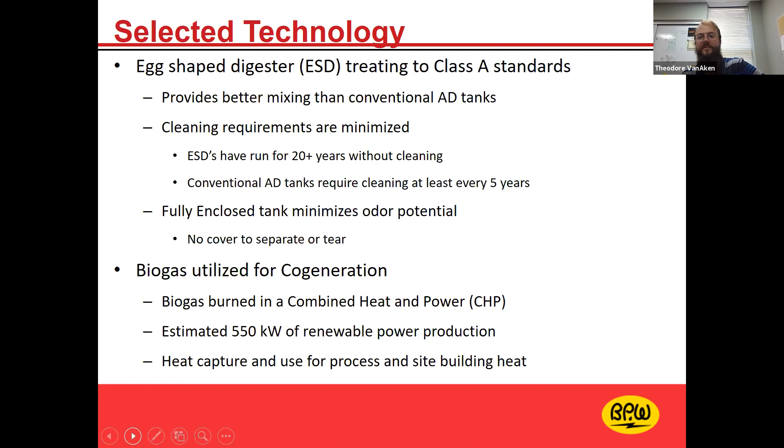We are going to utilize the biogas for cogeneration of electricity and heat. So our goal is 550 kilowatts of renewable power. That should power over half of our plant. And we're also going to use the heat not only to heat the digester process, but to heat the buildings around it as well. So it's a really nice project.

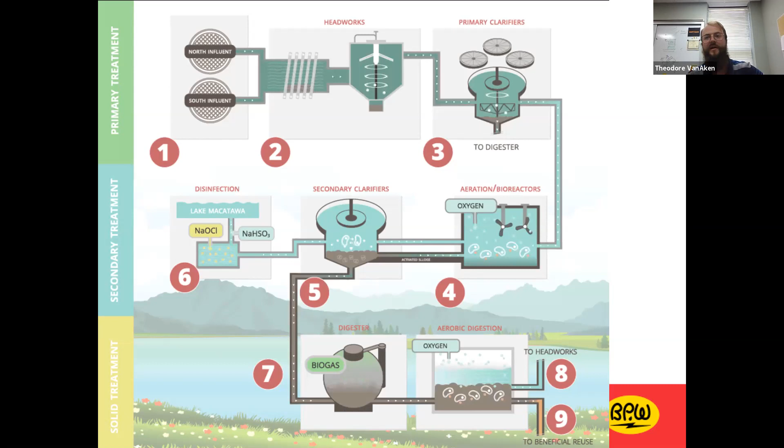So that's really the process of it, and then we were looking into what are the costs associated with this. It's not cheap to add anaerobic digestion. We're looking at a total capital cost of $33,700,000. You should note that's before we're able to subtract $6 million from that due to the Green Project Reserve through the state of Michigan. So really that's a big portion of the project that we're able to get covered. We're very happy about that.

In Holland, we always want to make sure that we are doing not only what's environmentally sustainable, but we need to be doing something that is also economically sustainable. So we run net present value calculations of all the project expenses. That includes operations, maintenance, equipment replacement, chemicals, electricity, everything that we can think of, we put in there to try and give us a good idea of what this is going to cost to run. And on average, we've been seeing about 7% per year disposal escalation on our biosolids disposal costs.

So we projected that out for 20 years. We wanted to compare not only what the digester costs, but what would happen if we just simply built a bigger storage tank and still land applied. Also, what would it cost if we did nothing? Unfortunately, we really can't do nothing, but this shows that it actually is cheaper for us to add the anaerobic digester. We're looking at $59.8 million as compared to $70 or $75 million.

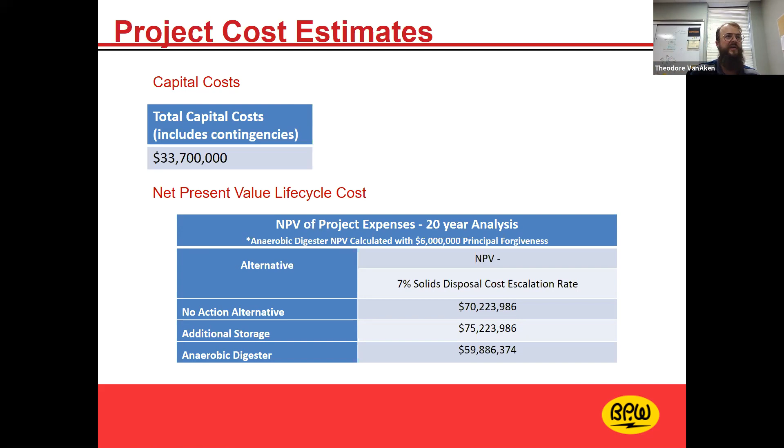So that's an all-in cost for 20 years. The beauty also is after 20 years, all the capital is paid off at that point, so it becomes even more affordable to utilize this process. The big cost savings come from the power and heat generation, but also because we're reducing the volume of solids. We're getting half of those solids taken care of right on our plants, less trucking, less disposal costs, and such.

So we also wanted to take a look and present, we've presented this around a few times. You may have seen it before. It's been in the Holland Sentinel, is what is this digester going to look like? We are very close to downtown. We understand that there's parks near us, there are condos near us. We're not trying to hide anything, we're just trying to do what we do in the best way possible to help the community out.

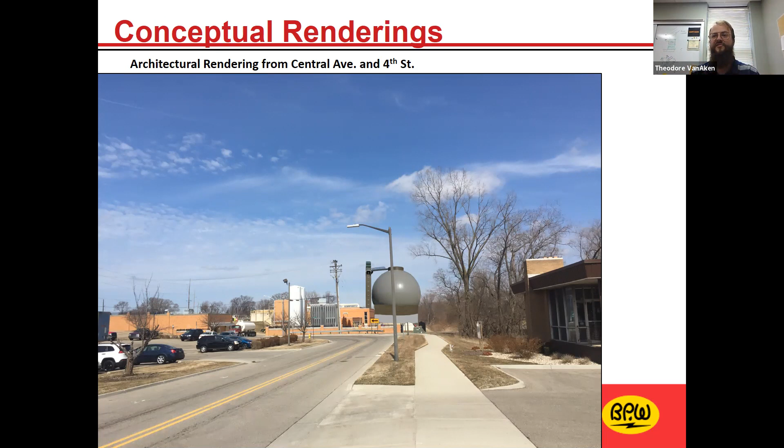So we're standing here on the south side of the plant, Central Avenue, looking north towards 3rd Street, and you can definitely tell it's there. Then I went for a bit of walking on this day, and I walked all the way up to the River Avenue Bridge, and I took a picture looking south. So now you can see on the right side of this photograph is the James DeYoung Power Plant, and on the left side, poking out from the trees, you can see the anaerobic digester.

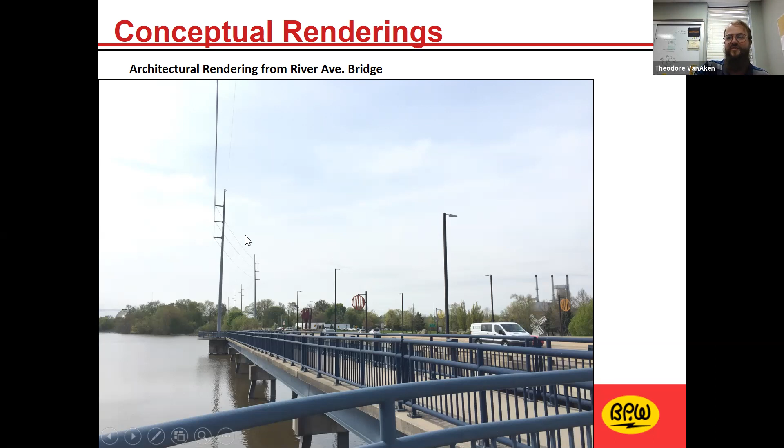We certainly want to be cognizant of our customers on the north side of the river. So I actually continued my walk all the way around to River Hills Drive, back behind the D&W. I stood by a lift station we have there, and I took a picture looking south, across the river. You can see the digesters on the left, and the James DeYoung plant is on the right.

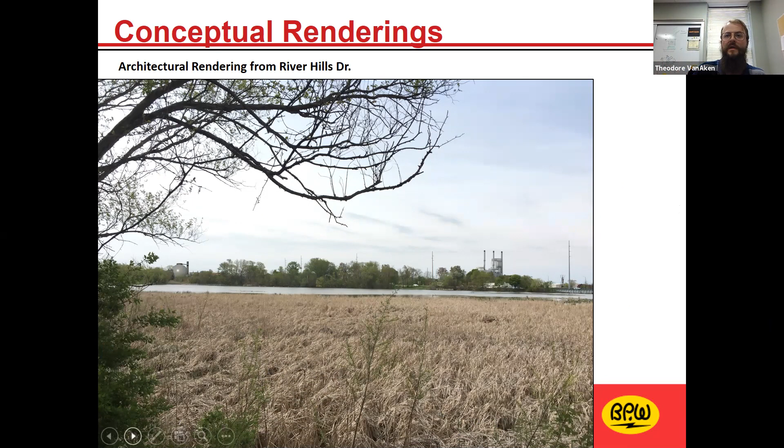And the last one, which is always very important, is how's it going to look from Windmill Island? So I climbed up in the parking lot, there is an observation platform. I got up as high as I could and took a picture, and this was a day after most of the leaves were down, so you can see about as good as you're gonna be able to see. I'll be honest, it's even hard for me to look at it.

You almost need to zoom in, but that's Freedom Village on the left. Maybe a third of the way from the right, you can see the little stair tower sticking up, and to the right of that is the egg. It's directly to the left of the James DeYoung smokestacks, which are visible. To me, that's great news, because for those that are afraid maybe it would sully the view from Windmill Island, during the summer when most of our visitors are here, you'll have a lot of nice foliage on those trees, so it should be green. You shouldn't really notice. I will throw out there that when we did the drawings, we picked gray, but there's really no reason the digester tank needs to be gray.

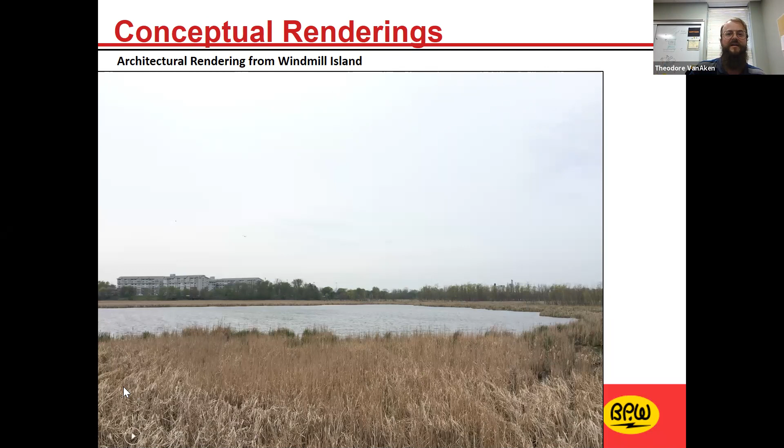So we've got a few different options, that's something that will be a part of the discussion going forward, is what it's going to look like.

This is another early schematic of what the plant would look like, looking eastward towards the digester. So the demolition has already started. It's going to be about a 3-year project, so I expect to have this digester online in May of 2023, and we're definitely looking forward to it.

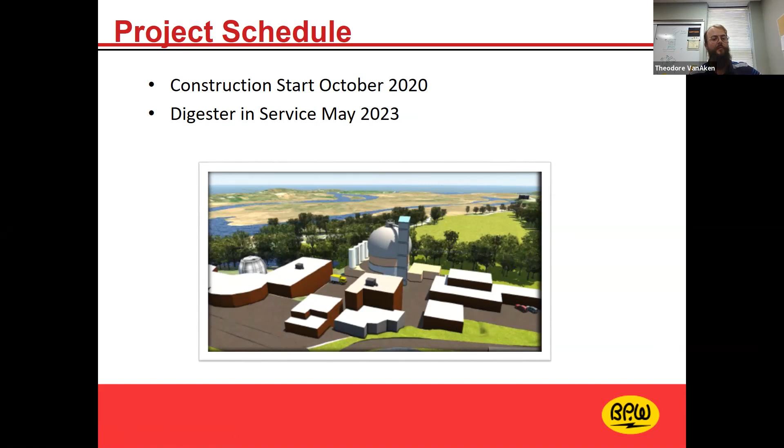I believe that is the end of my presentation, and I want to entertain any questions. Thank you for sticking with me, it's a lot of information.